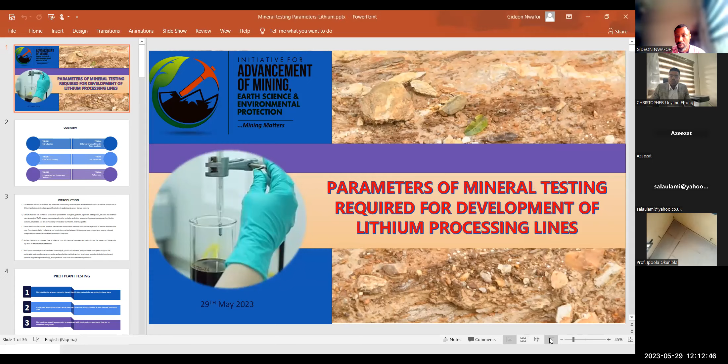You can unmute yourself. You can project from your end, right? He can project for me. Okay. Let me see. Okay, screen. Okay. Is that on now? Yes, perfect. Okay, you can go on.

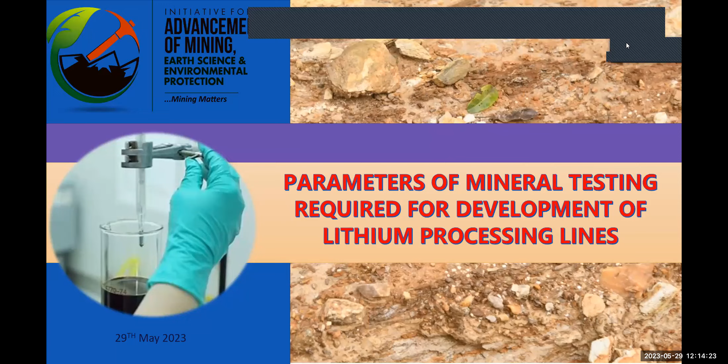Oh, okay. All right. So today we'll be looking at this shortly so that we don't waste much time. And happy inauguration, by the way. Today is a very tight schedule for everyone. I have to just run down just because of this, if not because of Gideon. He knows the kind of project I'm handling right now, so my schedule is very tight. But I just have to make myself available for this, for us. So thank you very much.

So we're looking at parameters of mineral testing required for development of lithium processing lines. And I know a lot of people will say, I'm not an investor. I don't want to build a lithium refining plant, or I don't want to build a mineral refining plant. So why are we having this topic? The way Nigeria is going, I'm promising you, once we get the right people into power, the mineral sector is a sector that can, on its own, take care of the Nigerian economy. I'm telling the gospel truth.

We have all the resources it takes, both critical metals, industrial deposits, base metals, whatever, all the metals you can think of, all the mineral ores you can think of, we have it in Nigeria. And they are not just in minute quantities, they are available in commercial quantities that can be mined and that can actually boost the economy of this country.

So you don't need to take any information for granted, because we already know what's happening in the lithium industry now. It's a far-reaching industry that almost everybody is trying to get something out of. Even the old men, the old women, the children. If you go to some mining sites, you see some children there trying to gather some lithium ores. So it's a very good project and a very good prospect for all of us.

But having said that, before you can set up any lithium processing plant, and it's the same for every other processing plant you may think of, there are some parameters you have to control. There are some parameters you have to test. So I'll be running you through all these parameters. They are many, but I'm just going to make it an overview so that we can get all the information that we might likely need.

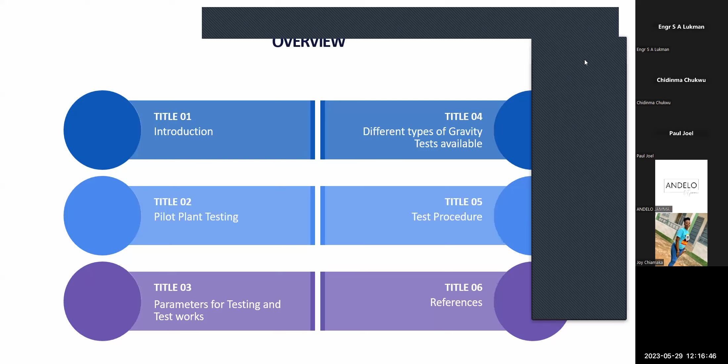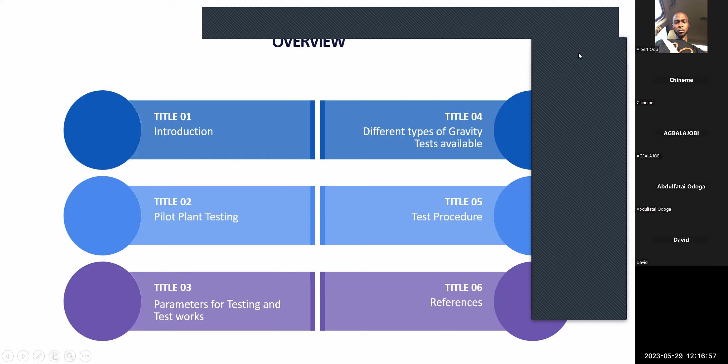Thank you. So looking at the introduction, looking at pilot plant testing, we're looking at parameters for testing and test work, we're looking at different types of gravity tests available, and then test procedure. Please, next slide.

Okay, so already we are all aware of the lithium rush in the world, not only in Nigeria. It's also happening in Africa, in every part of the world. Everybody's looking for lithium minerals, and the reason is simple: because of the use of lithium for different purposes, especially in lithium-ion battery technology, and also as an energy storage system. So everybody's looking for this metal to mine, or some people are looking for mining sites to buy. Like currently in Nigeria, you can see a lot of Chinese coming in on a daily basis to either buy it on the mining site or to actually exploit the minerals, as the case may be.

So it's a very fast growing technology. Lithium industry is a very fast industry in the world as of today. And lithium is not the only energy storage system. We classify it as ESS, energy storage system. There are other energy storage systems that are also in place. Like currently, there is new research on sodium-ion batteries.

The only difference in sodium-ion battery is that it does not have the capacity to store the energy for a long time. So everybody still falls back to lithium. But that does not withstand with the advent of science, and as the research is going on, I believe that they will have a breakthrough too for sodium metals.

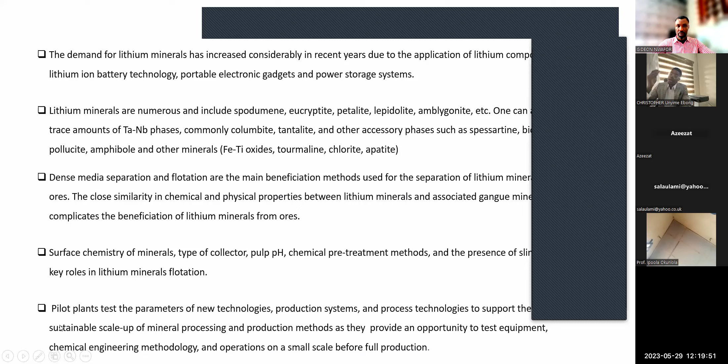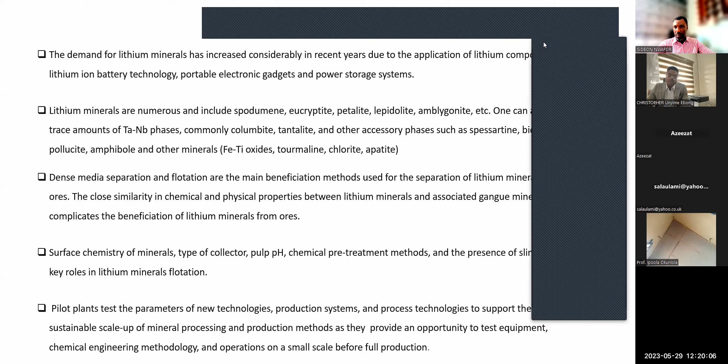All these lithium ores can be processed. Now, the purpose of processing is for us to concentrate these metals so that we can have them in high quality, and at the same time, with low impurities present. So there are different methods, different processes that are used for the processing of these metals, for the beneficiation of this lithium. So we are going to be looking at them, paying attention to the parameters that we need to test while setting up a lithium refining plant.

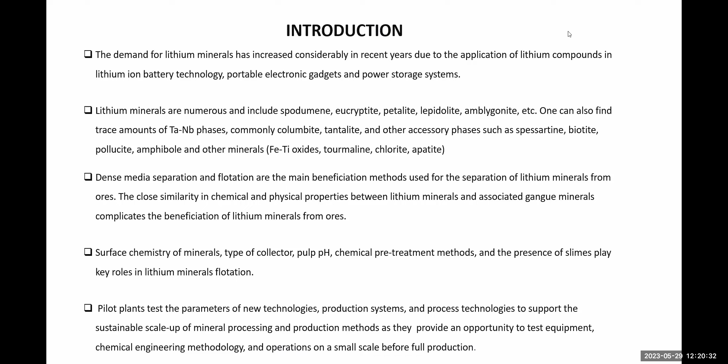And also, before we proceed, I have to pinpoint what we call a pilot plant. Please, next slide. A pilot plant. Next slide, please. Now, this is very, very important.

Last week, I went to one of the pilot plants here in Abuja. Why did I get there? The person called me; it's a lead and zinc beneficiation plant. But I came to find out that most of the lead and the zinc are present in the tailing. Imagine, to those of us that are in chemical and mineral processing, imagine having

So imagine having lead and zinc in tailing up to 20%. That means that a lot of processes were not controlled during the plant startup. And this is giving them a lot of issues because to fix this troubleshooting, they have to start again from the beginning. There's a lot of testing that has to be done, and they are going to spend a lot of money because all this testing was not done at the initial start of the plant. So a pilot plant is very important.

Before you start up any processing plant, first of all you must have a pilot plant. A pilot plant is just a prototype of the main plant, like a specimen of the main plant, but very small. Say, for instance, we have a ball mill of, let's say, 50 tons. In your pilot plant, you can just have a 1 ton ball mill. So everything in the pilot plant is just smaller in size. But the main function of the pilot plant is to reproduce whatever the larger plant is going to have in the long run.

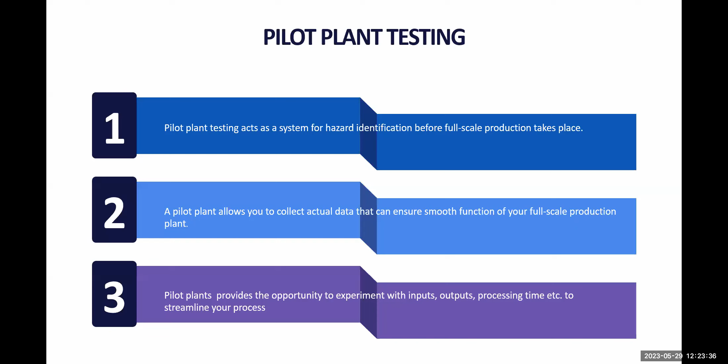So the pilot plant is very important. This will save you a lot of problems. The pilot plant testing, once it's done, will save you a lot of cost because you're able to know which part to optimize, which part not to optimize. You will know the dosage to use and which dosage not to use. So all our discussion today is going to be focusing on the pilot plant testing, because that is where the actual testing comes into play. Thank you. The next slide.

Next slide. So this is just an example of a pilot plant. This plant is designed for a 1 metric ton concentrate, just 1,000 kg. It's designed for it, but you can't use this to process at a profit. So this is just a prototype of the larger plant. After you have done all your testing, from the crushing section to the ball mill to the flotation and stuff like that, and once all the parameters are passed, you can now picture this and make it into a larger plant. Please, next slide.

All right, so why test works? Why do we have to carry out tests? It's very, very important that we carry out tests both in the plant and on the raw materials we are going to use, because it's not just the plant itself, also the raw materials. There's also what we call integrity tests. You have to do your integrity test on your equipment, on your instruments and everything. So one of the reasons why we have to test is for us to fix problems.

Whether your output is actually low grade or high grade, not just for low grade concentrate, also for your feed. If you don't test, how do you know the classification of your feed? How do you know the chemical properties of your feed? How do you know that that particular feed contains the metal of interest that can be separated with high efficiency, and also high impurity concentration, low recovery rate, high production cost, and improper equipment selection.

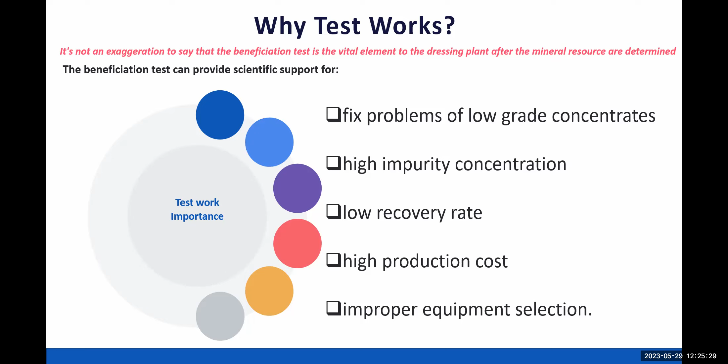So once you do your test, you'll be able to fix all these problems: your high impurity concentration, your low recovery rate, why is it low, and how to troubleshoot it, your high production cost, and also improper equipment selection. So tests will be able to give you scientific support for all this I've just mentioned. Next slide. Next slide.

So there are other kinds of tests to conduct, okay? These are just preliminary tests you have to conduct, like the process check. There's a process check for an existing plant, a plant that is already in existence. It can be your pilot plant or your main plant. So the process check occurs both in your pilot plant and in your main plant. It's just going to check the cause of problems. So you monitor the process, you check what are the causes, what are the problems, you troubleshoot, and then you find a solution.

Also, there's a simple exploration test for beneficiation, for investment analysis and initial value assessment of investment before buying a mining claim. You cannot buy a mining site without doing an exploration study. And as Nigerians, we love shortcuts. I've seen a lot of people go to a mining cadastral office, the office gave them a coordinate, and just because they've seen a coordinate and the mining cadastral man told them that there's lithium, they just went ahead and began to pay money.

It's very, very wrong. Once you see a site that you want to buy, the first thing you have to do is exploration, and not just ordinary exploration. Lithium is relatively a new business in Nigeria, and a lot of our geologists, sorry to say, do not understand the exploration of lithium. So you have to look for people that have the knowledge and experience in exploring these metals, to bring them into action so that they can do proper exploration for you.

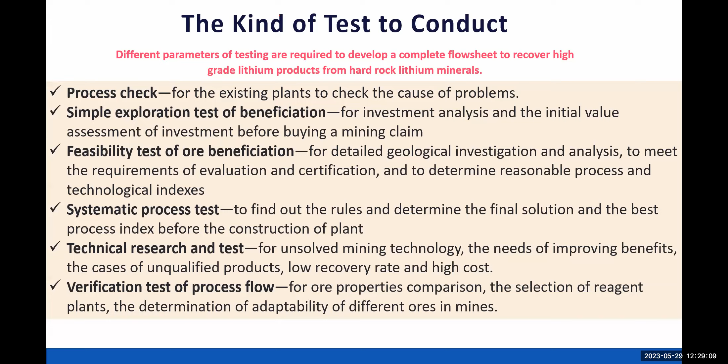All right, so when do we do this test? Remember, we have not actually come to the parameters yet. We are just trying to have the purchase of ores. Before you can buy any mineral, you have to run tests on it. In this case, it might be a chemical test. We are going to come to that in detail. You have to understand what you are buying. And that is one of the problems we are facing in Nigeria as far as lithium is concerned.

You see a supplier telling you it has 7% grade lithium, 7% Li2O. And once you take the sample to the lab, you discover that it's 3%. And possibly you were not so smart, you already paid the man, and he just collected money for 7%. So before you buy any of your ore for lithium, whether lepidolite, amblygonite, or spodumene, you have to run a test on it. The test does not just mean a lab test. There are a lot of different tests you have to do.

Physical test, like for lepidolite, the one they call Morgan. That is one of the local methods of testing lepidolite in the field. Anytime we go to the field, we just carry a bottle of water, and when we see a suspected lepidolite or Morgan, we pour water on it and it changes color. So we just assume that is so. You have to run tests on the ore you want to purchase. The same thing goes for your mining site. You need to also have data on your mining site.

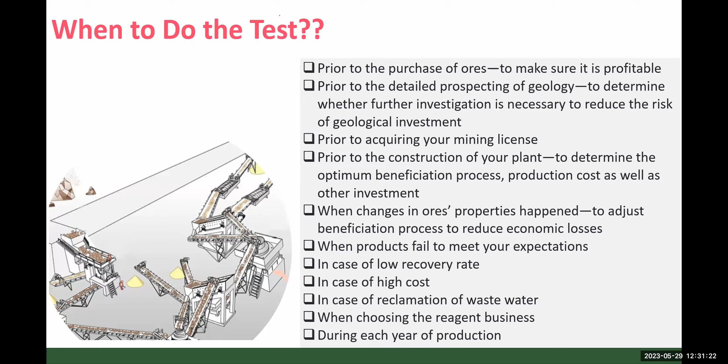Don't rush it, because the moment you start rushing it, you're definitely going to make mistakes. So please, I don't know if I'm rushing because I'm trying to meet up the time, okay? But I don't know if I'm fluid. I think it's okay. It's okay. Yeah. All right. Okay.

So also, when do you also need to test? Prior to acquiring your mining license, you also have to test, and that must have been encapsulated during your exploration. Then prior to the construction of your plant, you also have to determine the optimum beneficiation process, production cost, as well as other investment. So you also have to carry out some tests, including the cost of your investment, which has to be factored in. You also have to test your risk.

Testing your risk. You want to open a beneficiation plant in Nigeria. What are the risks involved? The economic risk involved, the security risk involved. You have to also test those risks and check if it's viable. Currently, my company is setting up a lithium refining plant in Nigeria. And I myself started my career in base metal mineral processing plants for lead and zinc.

But before you set up those plants, you have to calculate the risk. We calculated the risk. If we set up these plants in so-so state, what are the security challenges? If we want to set it in the south-south, how soon can we get the lithium ores? Because there's no lithium in the south-south, except for places like Rivers State, which is just relatively new. So how do we get materials from the north down to south? So you have to test all those risks. There are also parameters you have to test before starting up your plant.

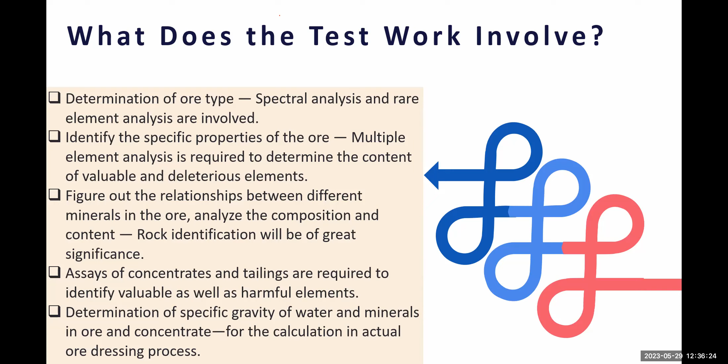All right. Now we are at the main topic: parameters that are required to develop a complete flowsheet to recover high-grade lithium product from hard rock lithium minerals. If I discussed each of them, it might take us up to a month each, because there are parameters inside the parameters. But we're just going to have an overview of what we need to know as a chemist, as an individual, as a civil servant, as people that love metals or mining.

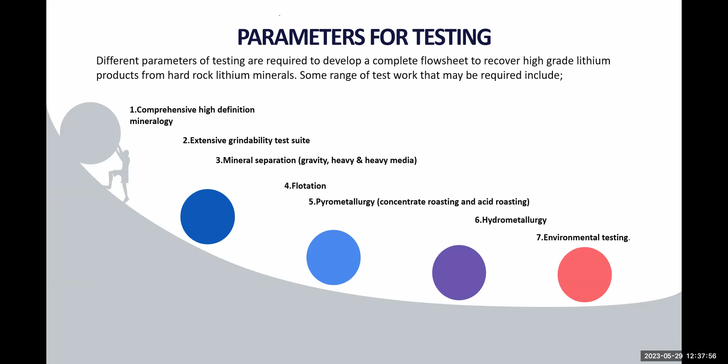I'm going to give you an overview of this so we can go back and look at those parameters to test, so you understand how lithium carbonate and lithium hydroxide are being gotten. So you feed your ore body from the mining site, and they bring it down to your primary crusher.

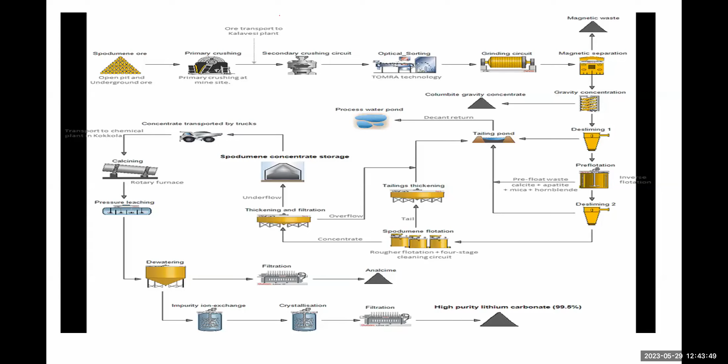Because of the high buoyancy, it floats here with other chemicals that are added, like the collectors that are added to give it that characteristic of floating. So it floats here, and then it moves down to where you now have the concentrate. From your concentrate, you have thickening and filtration, where the water will be removed. Once the water is removed, we move to our concentrate tank, where pyrometallurgy takes place. We subject the ore body to sometimes 1,500 degrees centigrade to do calcination.

We remove every organic matter that is present in the concentrate, so that at the end of the day, you can see the last. Look at the last drawing there that looks like sand, a heap of sand. You can see you're having 99.5% lithium carbonate or lithium hydroxide, depending on the kind of ion exchangers that were used in the process.

So remember here, sorry, I forgot to tell you this, the feed ore for this spodumene we designed is 1.5. So it's 1.5% of lithium oxide. 1.5% lithium oxide was feed. At the end of the day, at the flotation, at the concentrate, we are having 6 to 7%. While at the filtration, after pyrometallurgy, we are having 99.5%.

So you can see that we are wasting most of our ores in Nigeria, because the Chinese man will tell you that if it's not up to 3%, it's not buying. If it's not up to 5%, it's not buying. But you can see that at the end of the day, from 1.5%, we're able to concentrate it to 6 to 7%. So we can actually start this beneficiation plant in Nigeria. We can do it individually, we can get funds, we can get loans, we can start it.

If you go to all the mining sites now in Nigeria, even our own mining site, we already have what we call the intercalation ore. Those intercalation ores are ores that are not up to 3%. We just keep them because of the refining plant. So once the refining plants come on board, we just take all those materials and then concentrate them to 7%.

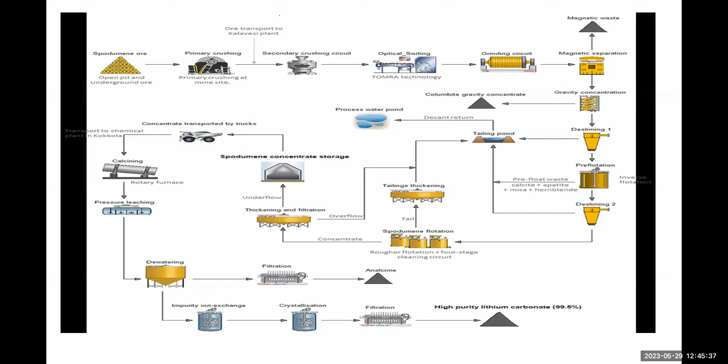So you can see that we are just wasting a lot of our minerals because we don't have a beneficiation plant that can concentrate the mineral, that can convert the mineral from 1.5% to 7% for us. So this is just a simple flowchart of the spodumene beneficiation plant. So next slide, please, so that we look at the comprehensive high definition mineralogy.

Now, this is very important. Test work in mineral analysis is very, very important. For you to understand the constraints of your mineral, you have to test it. Just like I told you, it's not every lithium ore that gives 7% that is spodumene. All right? It's not every lithium ore that gives you 8% that is spodumene. I think last week we analyzed a lithium sample that gave us 4%. I can shock you that lithium that gave us 4% was amblygonite.

But you might not know, because a supplier gave you a sample and the sample is giving you 5%. You're happy, hey, I have spodumene. At the end of the day, you wasted your money, because you are now paying in terms of spodumene, not amblygonite. As of today, I know that the price of spodumene, because of the market, is around 1 million naira, and that of amblygonite is around 600,000. So you're now going to pay 1 million naira for amblygonite, wasting your funds. And at the end of the day, it does not meet your buyer's specification. So test work is very, very important where lithium is concerned.

And in Nigeria, let me tell you the gospel truth, that's the problem we are having, including our so-called government labs. I don't know if there's any government personnel here. Please, you have to go and work on your people. Let's have reputation. The sincere truth is, I've analyzed a lot of results for international companies. Sometimes they will send me a report and say, hey, Chris, look at this result very well. And most of the results I've been getting from Nigeria, 90% of them, are doctored. I'm telling you the gospel truth. Either doctored, or they do not have the proficiency to carry out analysis on lithium minerals.

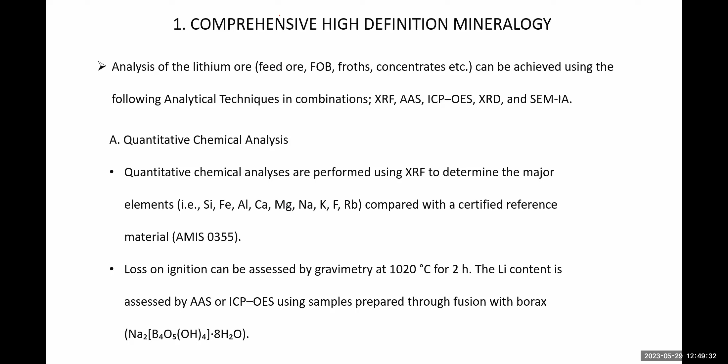And please note this: any method that you're going to use for the analysis of your lithium content must be a flame technique, meaning that the material has to be burnt, the atom has to be atomized, either through absorption or emission. You should have a detector that can detect through absorption or emission. So the flame techniques we have can be a flame photometer, AAS or ICP. All these use heat to atomize the lithium content in the material.

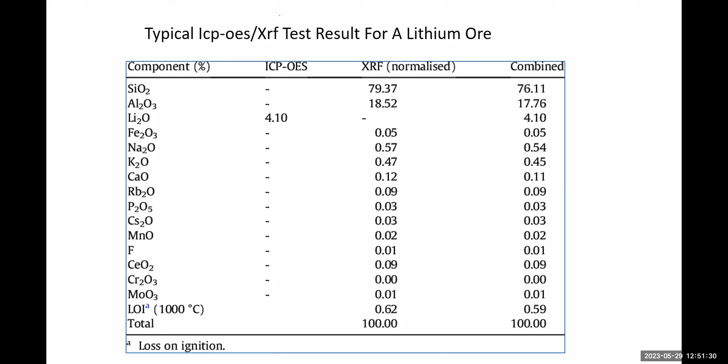But if I don't have lab work on it, how will I know? I might not know. And even in this case, 4% to me is a high feed. I can't feed this into my plant because it's already high. What I need is just 1.5 or minimum 2%. Then I can concentrate it to 5 or 6 to 7. So chemical analysis is very important to understand your ore body. Next slide.

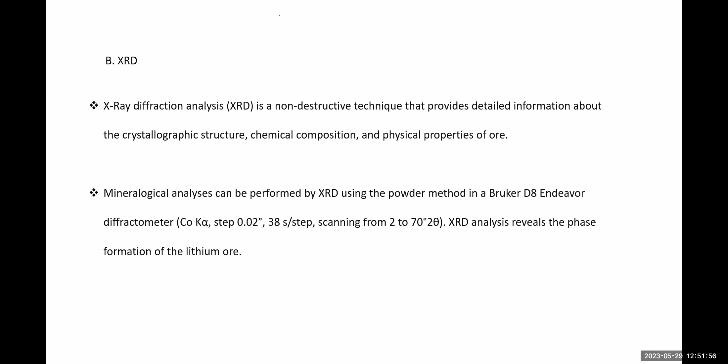And also XRD gives you phase differentiation. The XRF, AAS, ICP-OES and the likes of them cannot tell you the type of spodumene, the type of lithium. But XRD, with phase differentiation, is going to tell you which lithium ore is present in the site. Look at the next slide. Now, this is a typical result from an XRD analysis that was done for a sample that I want to use in my plant.

So you can see now that the XRD analysis, from the chromatogram you are seeing there, gives you the different kinds of lithium that are present. You can see alpha spodumene and beta spodumene. The alpha and beta is just a difference in temperature. The normal occurrence of spodumene is alpha, and once you heat it to 1000 degrees centigrade, it's converted to beta.

So in processing, once it gets to concentrate, what we are now working with is beta spodumene, no longer alpha. But at that initial ore stage, raw ore is alpha spodumene. It can also show you the quartz content, the albite and the lepidolite, beryl, and others. It shows the compounds that are present other than just the lithium.

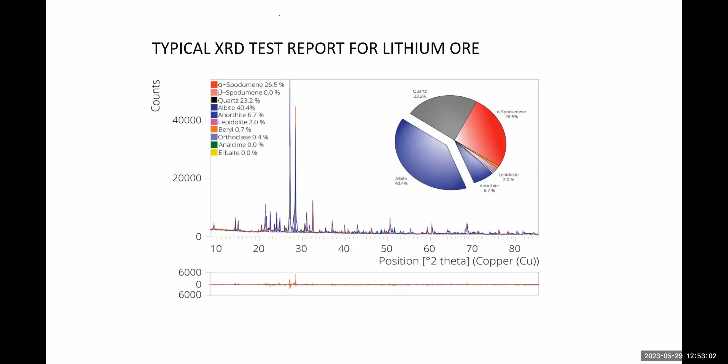Or even if it's a lithium material, what kind of lithium is present? XRD is going to give you that phase differentiation, that detail. So chemical testing is very, very important as one of the parameters for working on a lithium processing line. Please, next one.

Now, this is also very important. When I was explaining the flowchart for lithium processing, I made mention of the crushers, the jaw crushers, the primary crusher, secondary crusher, and the ball mill. Now, this is where these factors come into play. Extensive grindability test. A grindability test is a procedure that evaluates the resistance of a material to ball milling. This test is an effective way to calculate and compare the bond work index, BWI, of different ores. The higher the bond index, the more difficult it is to grind the material.

Now, you have to understand your ore body. How hard is your ore body? Because the hardness of the ore body determines the kind of crusher you are using. There are some beneficiation plants, like the one they recently commissioned in Zimbabwe. I have a friend that is working there. They only have one crusher, a secondary crusher. From the secondary crusher, it moves down to the ball mill, because they were able to do a grindability test to study the hardness of the material.

So before you even set up your plant, you have to understand how hard is this mineral? Is this mineral hard? And what is the extent of the hardness? So that's what the grindability test is all about. And if you don't test this, and then you go and use a particular...

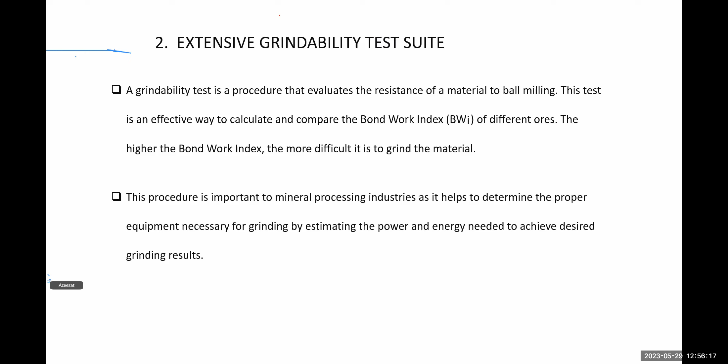So let's look at the ball mill here. Next. This is just a ball mill that does the grinding work. In our own, 25 mm is fed into the ball mill, and at the end of the day, we're having 75 microns, or 200 mesh size. So if you don't understand the grindability study, you might end up losing your ball mill all the time.

So because there are different kinds of ball mill for different specifications, you cannot use the ball mill that is used in gold. You can't use that one if maybe you want to do rutile or tin ore. You can't use it because they have different bond strength. They have different grindability test results.

So you have to use a ball mill that has the capacity to be able to grind your ore body into the specified size without getting itself damaged, and at the same time also have efficiency of grinding. This our presentation does not cover efficiency of grinding.

But in a nutshell, let's say you are feeding in 100 kg of material to the ball mill. How many percentage do you have as the output of the ball mill? So you can also calculate the efficiency of the ball mill as well. Please, the next slide.

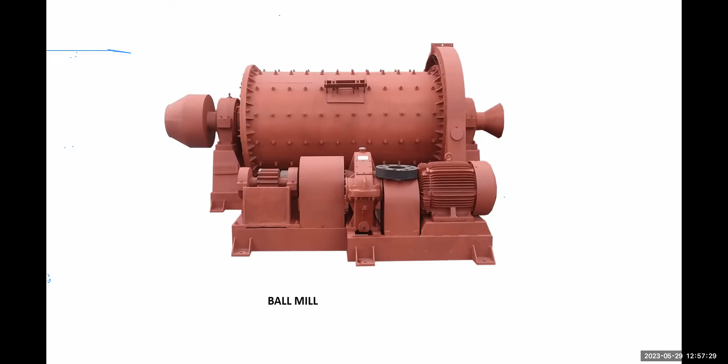So this is just what happens actually in the ball mill, where there's impact. For material to be ground, there must be impact, all right? Two materials coming together with each other, and then compression. Compression must take place where the balls, that's why they call it ball mill. So there are balls inside that hit themselves together. They also hit the material, thereby bringing the material into a tiny particle, which we call compression.

And also there's friction, two surfaces of the material come in contact with each other. So that friction can also result in the grinding of the material in question. So if your bond work energy is not enough, impact will not be efficient, compression will not be efficient, and friction too will not be efficient. At the end of the day, you might end up not having the required grain size for your beneficiation.

Remember, beneficiation deals only on grain size. If the grain size is not fine enough, it can't float. It can never float. So you must ensure that your grinding test is positive. If it's not positive, you have to go back, study your ore nature, then look for a ball mill that has the capacity to grind the ore.

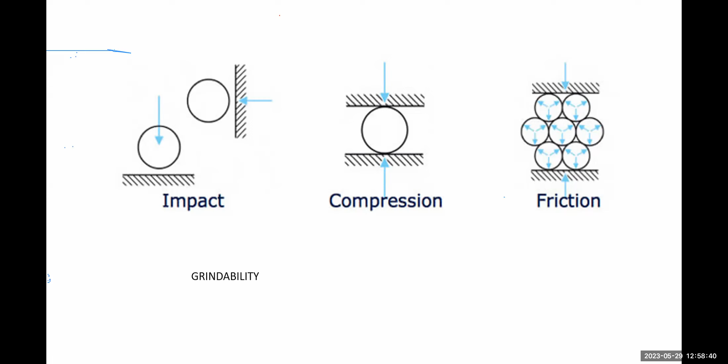Please, next slide. So these are different kinds of ball mill, other types of techniques that are used for grindability test. I think once the slide is shared, you can go and read on it. But we are emphasizing on bond work index test. That is the one we are concerned about because that is the one we are using.

Bond work index test. This one is to calculate the power requirement and the size of rod and ball mill for a circuit. So if you can only do this bond work index test for your plant, it's enough. It covers everything because it will determine the power. When we talk about the power, we're talking about the energy needed by the ball mill. You can't be having a 500 kVA generator and you are using a ball mill of 499. You definitely kill your generator.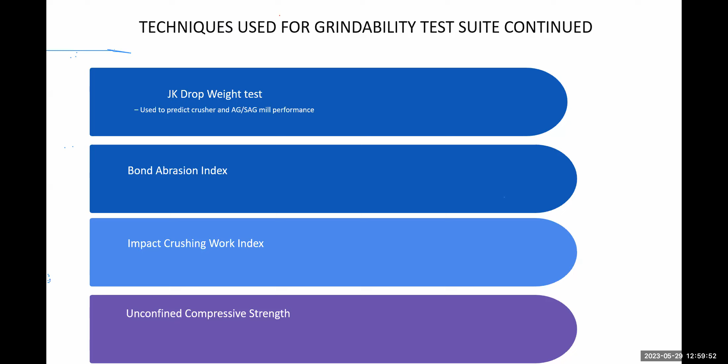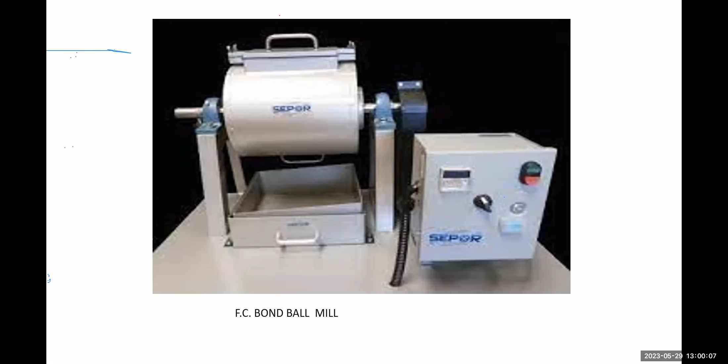FC bond ball mill. This is the equipment that is used in doing grindability tests. So let me just give you a quick run of the procedure. How do you do this grindability test to determine if your ore body is suitable for that particular ball mill? Please, next slide.

A test sample is staged. Your feed is crushed to 3.5 millimeters maximum feed size, and then it's compacted into a 700cc tube. You just have a tube, either a glass tube or a PVC tube. You add your 3.5 millimeter feed into this tube. You compact it very well, make sure it's compacted.

Then you measure it. Once properly measured, the sample is placed in the universal FC ball mill. That's the equipment I just showed you before now. You place the sample inside there to accurately calculate the bond work index of the material. What does the machine do generally? The machine carries out what we call revolutions. Once you put your sample into that machine, there's revolution.

So as the revolution is going on, remember what I showed in the other slide, impact will be recorded, compression will be recorded, and then friction will be recorded, because these are the three parameters that cause grinding.

So these are the three parameters that cause the grinding. After a set of revolutions is completed, the sample is removed and then screened over 100 mesh size. So after the grinding is done, after the revolution is completed, you have to screen it through 100 mesh size, and then you calculate the amount that is on the top, like you can call it supernatant in this case. The supernatant that is on the top of the screen, you can call that one negative, and then you calculate over the one that passed through the 100 mesh size.

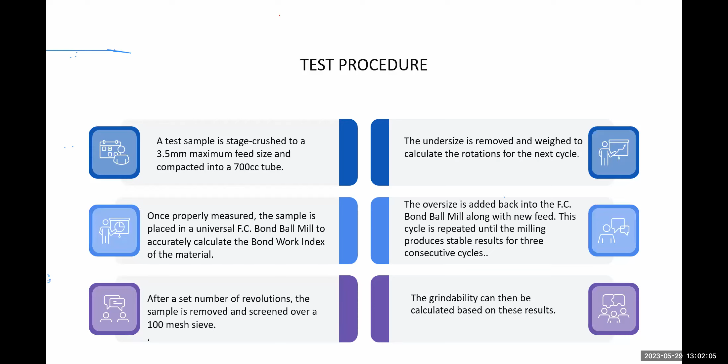All right, so we are having two things now: the supernatant negative on top of the mesh, and then the one that passes through the mesh. You can call that one positive. So those are the two values that we are going to use to conduct this test. Now there's a formula. Please, next slide.

Okay. Now the bond work index. Remember, we're looking at the bond work index. The bond work index is measured in kilowatt-hours, typical values range from 7 to 20, all right? Soft material has a BWI of between 7 to 9. Anything over 14 is considered hard. So once you do this test, your result is definitely going to tell you which ball mill you are going to use.

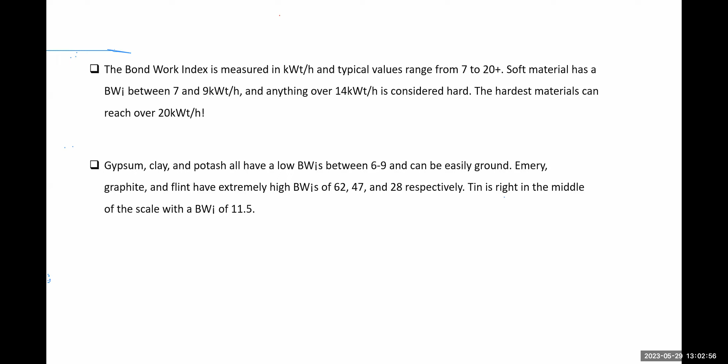Remember, there is a lot of chemical engineering work that has to be done here, but I'm not taking us to the engineering part. I'm just trying to make us have a knowledge of what a grindability test is. There are a lot of calculations here, but we are not touching that. What we just want to know is that you have to know if your material is soft, if it's suitable for that particular ball mill. If it's not suitable, then you look for another ball mill. So, for instance, look at this scale. Next slide.

This is a table that shows different minerals, bauxite, copper, down to zinc ore, with different bond work indexes, all right? And we already classified, according to our previous slide, from 7 to 20; from 7 to 9, they are soft material. But anyone that has a value above 14 is considered to be hard. So you can look at this table here.

Look for copper. Copper is 12, so it's relatively still a little bit hard. Look at limestone, it's 12 too. Look at zinc ore and rutile too. They are also 12, so these ones are also relatively hard. You can also see the equation here. After you have done the grindability test, remember I told you that you're going to have some part suspended on the top of the mesh, and some part that is going to be at the bottom.

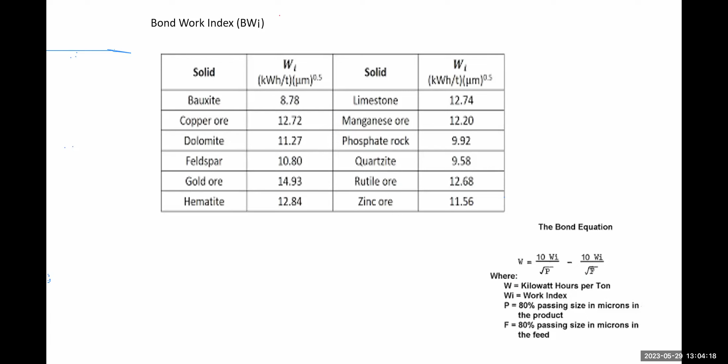So these are the factors: P, the 80% passing size in microns of the product, the one that passes through, and then the 80% passing size in microns of the feed. So you take all these parameters into the equation, and you'll be able to calculate the bond work index. And once you have the bond work index, you're able to look for a ball mill that has the capacity to mill or grind that particular ore body. Next slide.

So mineral separation. For mineral separation, we have gravity, and also heavy liquid and heavy media. Gravity tests, also known as gravity separation tests, are used to determine if an ore constituent can be concentrated by exploiting the differences in density, shape, or size between the constituent of interest and the waste material. Remember when I was giving you a flow chart of the spodumene processing plant, I told you we have a gravity channel, all right?

So the gravity test takes into consideration the difference in density. So if you have spodumene having a density of 0.5 grams per cm3, if you add it to water, it's definitely going to float. So that is also a mineral separation technique that can be used in processing of lithium minerals. All right, next slide.

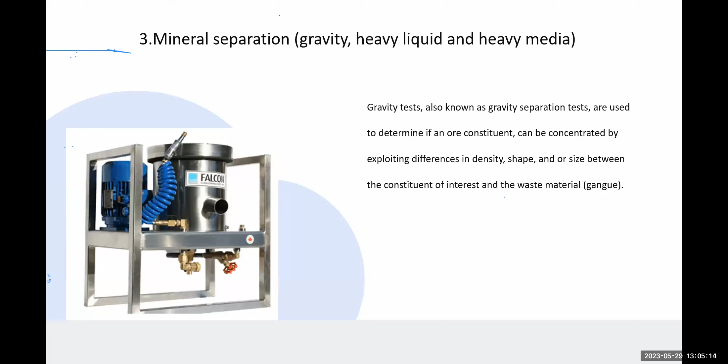Next slide. Okay, so why use gravity concentration? Why do we need gravity concentration? Now, gravity concentration is often an effective and economic unit operation with low capital and operating cost. It does not need much money. You just have to take advantage of the density of the two materials, the one that is floating and the media itself. So the process can also be environmentally favorable, as little to no reagents are used in the process.

I told you earlier, it's just your water, and then your analyte of interest has been floated due to their difference in density. Gravity separation is an industrial method for separating two components, either in suspension or in dry condition, from a granular mixture. Remember, for floating to be done, the material has to have sufficient buoyancy. You have to take note of that.

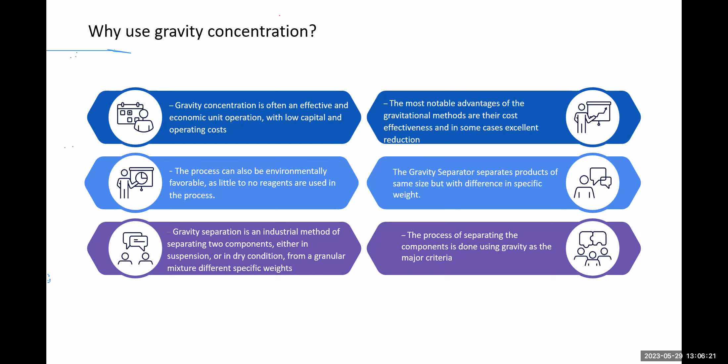Because I'm saying that the gravity of lithium is 0.5, it does not mean that if you carry a lump of lithium and add it to water, it will not sink down. It definitely sinks down. But the gravity here, we are considering the gravity based on the buoyancy. So the buoyancy at a fine grain size is 0.5, which means that it has a density that is lower than that of the water. All right, please, next slide.

Now, if peradventure the iron content is high in that particular lithium material, what do you think will happen? It's simple. Iron has a higher density than water. So once you have an iron content, the iron content will sink. So in this case, you're now collecting the iron as a tailing. Okay? While you're now collecting your lithium as the froth, because it will now be frothing on top, because both of them have different densities.

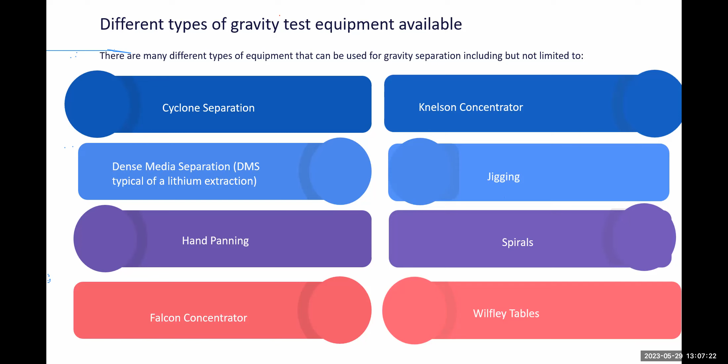So we are currently using hydrocyclones, all right? There's also dense media separation, hand panning, and so on and so forth. So these are different types of gravity test equipment. Next.

So how do we conduct gravity test analysis? How do we do that as a chemical engineer or as a mineral chemist? First of all, gravity test procedure can vary depending on the type of equipment being used. Just as I said, there are different kinds of equipment like the hydrocyclones. So if you are using hydrocyclones, there are different kinds of techniques you have to use. Generally, a known amount of material is processed by gravity concentration equipment.

So you send the material to your gravity equipment, all right, with the different reagents. If you are using water or any other reagent, you feed in the material, and as a result you're going to have a concentrate and a tailing product. The concentrate can be the one floating, or it can be the one at the bottom. You collect it as tail, as the case may be. So the concentrate and tailing are then weighed, dried, and assayed to determine final constituent mass balance and recovery.

What do we mean by this? Remember, the purpose of processing is for us to concentrate the ore. So take for instance, you are feeding in 1.5% Li2O. Now, if you pass it through the gravity test, we are expecting you to have at least an increment from the initial feed. After you've gotten the increment, you have to calculate the percent recovery of the increment. So if the percent recovery of the increment is not sufficient enough, then that means something is wrong with your gravity test, and you have to revisit it and work again.

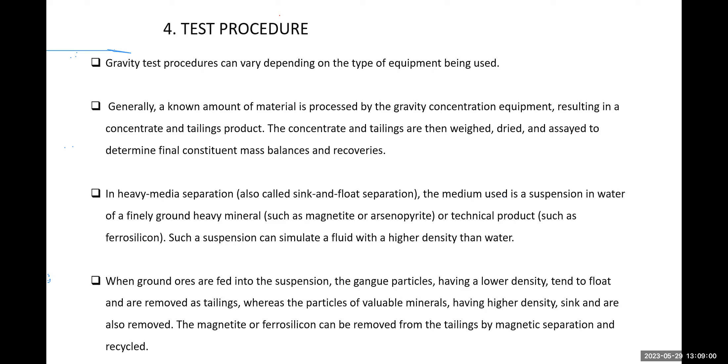So how do you know that the increment is sufficient? You have to test the concentrate that is gotten from the gravity test and also the tailing. Remember, either the one floating or at the bottom. You have to test those two, and then from there you get the result. It is that result you're going to use to fine-tune your process. Okay, next one because of time. Next.

Yes, flotation is a very important part of mineral processing. After I've taught flotation, I think we are almost at the end of the slides, so don't worry, we're almost going out now. It's very important, especially when it comes to lithium, all right? There are other different techniques that can be used for extraction of lithium, but flotation gives us the best recovery. And currently, from our plants, the specification, everything is done based on flotation.

And if you have been following what I've been saying from the beginning, flotation is the most widely used method for the concentration of fine-grained minerals. It takes advantage of the different physicochemical surface properties of minerals. It has to do with the surface chemistry. All right. Sometimes surface chemistry might not be an inherent nature of the ore. Please take note of this. Sometimes the surface chemistry of the material might not be an inherent nature of the ore, meaning you have to impact on it by using chemicals and reagents.

Like for lead and zinc, if you are processing lead and zinc, once you get to the slurry, you have to add different chemicals. You have to add your MIBC, your xanthate, you have to depress, you have to activate with copper sulfate, zinc sulfate, and so on and so forth, because you want to play with your surface chemistry. You want to see which one can float at the expense of the other one, all right? So the surface chemistry property sometimes might not be an inherent nature of the material. Sometimes you have to enforce it by using some chemical reagents.

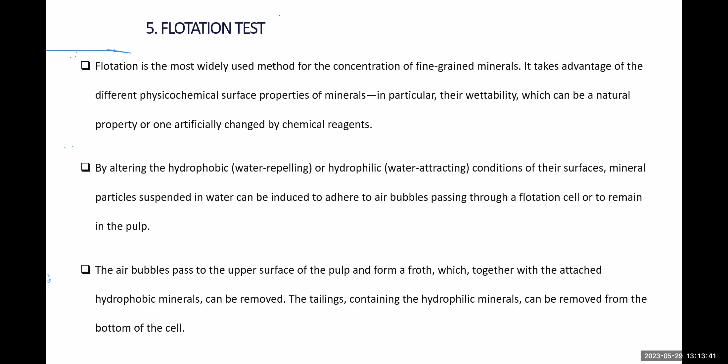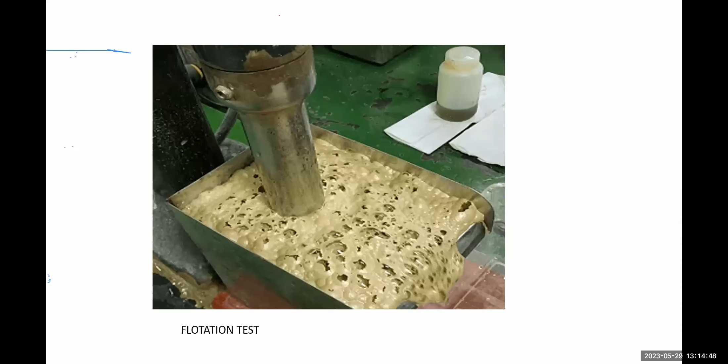Whatever you're scraping out contains the analyte of interest, which in this case is our lithium oxide, not hydroxide. Hydroxide is gotten from the refining process. It's oxide that you get from the beneficiation. So all these things you are doing here, you are just trying to concentrate the oxide to 5 to 7% oxide. Next slide. Then we are almost done.

Now, the flotation test, very simple. A known amount of ore and water is added to create a slurry. We add a known amount of ore and also a known amount of water, and we create a slurry, like a paste, just like what I showed in the previous slide. Then we add reagents. Why are we adding the reagents?

I told you earlier that some of these minerals do not have inherent surface properties, so you have to alter their surface chemistry. So sometimes you add reagents to it. In this case, we add some activators, sodium hydroxide, depending on whether it's spodumene or lepidolite. Once you add it, you'll be able to alter the surface chemistry of this material. Then chemical collectors are added to the slurry to form hydrophobic surfaces on the constituents of interest. So you form hydrophobic surfaces.

When we say hydrophobic surfaces, it does not get itself attached to the solution, because hydrophobic does not react on its own. It does not love anything. So it's easy for this hydrophobic material to come out from the solution and then you scrape it out. Now, air or nitrogen is then bubbled through the agitated slurry. The air bubbles come into contact with the hydrophobic surfaces, transporting them to the surface where they form a froth or foam.

The hydrophobic nature, which you have changed using your chemical dosing, is blown up by air or nitrogen. Sometimes, like the ones we have here, you are not going to add any blower or compressor; it comes together in the system. But for some you have to fabricate a blower that will increase the buoyancy of the grain material. So it blows the material as air bubbles, and they come in contact with the hydrophobic surfaces, transporting them to the surface where they form a froth or a foam, like what I showed you.

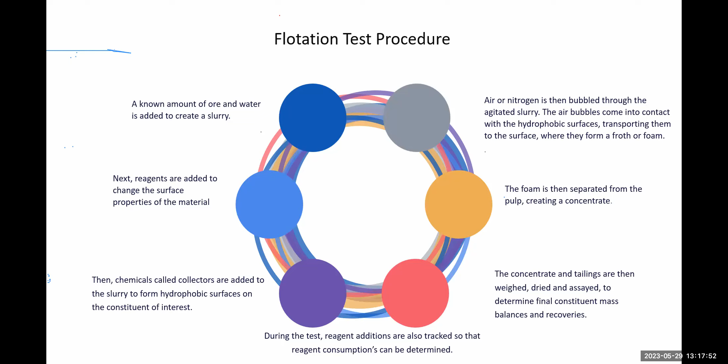If you don't control this process in the beginning, you're going to spend a lot of money and waste your energy, and who knows if it's going to work or not. So you have to test all these parameters. Okay, so pyrometallurgy, please next slide. Pyrometallurgy has to do with, next slide.

Okay, this has to do with, now you've gotten your concentrate, you are trying to move the concentrate from just being a concentrate to a refined lithium hydroxide or lithium carbonate that can be used for the production of our ESS, energy storage system. So it's just for you to do calcination, all right?

You subject the ore to high temperature, sometimes using a furnace, or it can be a hydrometallurgy process. So you use a furnace, you heat the concentrate, you remove all the organic matter that might be present, and every other volatile organic constituent that is present, you remove them, and then the refining process continues.

You pass it through your ion exchange, you remove any other material that is present through your ion exchange. From your ion exchange, you'll be able to have your lithium concentrate, your lithium hydroxide or your lithium carbonate as either 90% or 99.9% lithium carbonate or lithium hydroxide.

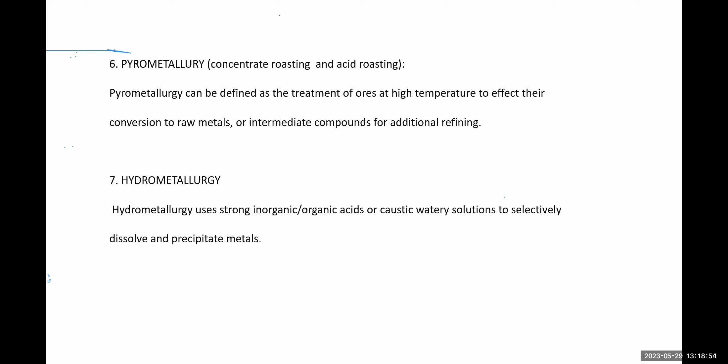And then lastly, which is very important, is your environmental testing, which is what we are still lacking in Nigeria. I've been to four plants in Nigeria, one for copper, one for zinc, two for lead and zinc. What I noticed is that our Ministry of Environment is not doing their job properly.

Take for instance, you have sodium cyanide, you can't dispose of your sodium cyanide properly, and it gets back to the environment. It has a lot of implications for the health of the people, the health of the society. You are putting the health of the society at risk. So at the end of the day, you have to ask yourself, how am I going to control the effluent I'm generating through this process?

It's not just good enough for you to have a pilot plant or to want to build a big plant without also taking into consideration the environmental impact, the health impact it's going to have on the general populace. So it's also very important that we do environmental testing. And one of the best ones we normally use in environmental testing is the bottle roll test.

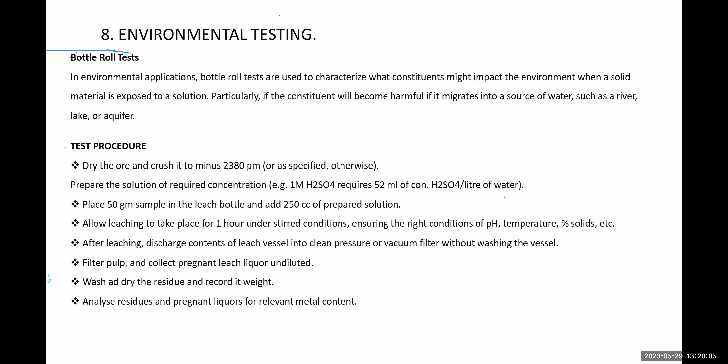Very simple test. It's like a leaching test where you take your ore of interest, maybe lithium, you add some solutions to it, and then you agitate it. There's an instrument that does the agitation. Please, next slide, let me show you the equipment that does the agitation. Next slide. Okay, the instrument that does the agitation.

So you insert your sample inside with a different reagent that will cause leaching. Agitation is done. Once the agitation is completed, you take out the solution and run a test on it. Now, why are you testing it? You are testing it for parameters that might be dangerous to health or dangerous to the environment, including your marine ecosystem as well.

So you test for parameters like mercury, lead, and all the rest, because the solvent you are using for this extraction must be able to extract lead, mercury, and every other harmful element that might be present in the ore body. So you insert it into your equipment, you agitate it for some hours, and then you bring it out, and then you carry out a lab analysis to determine the concentration of each of the parameters, and then you assess it.

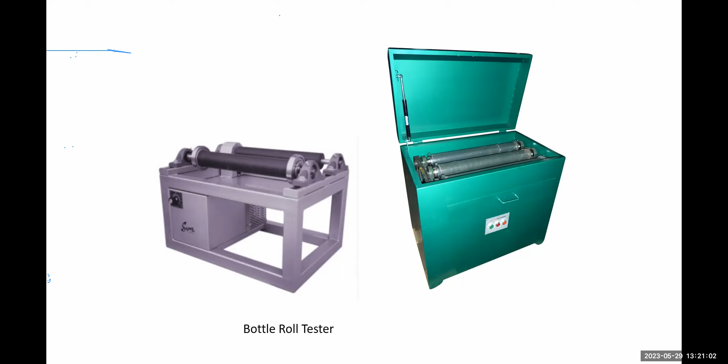I think this is all we have for now. We can't go far because of time, just trying to rush it, but the thing is just simple. We can develop this lithium refining plant. We don't need to waste our 1.5%. The 1.5% can be beneficiated, and we have 6%, and we can now sell our 6%.

So no need for a Chinese man to be telling you that it must be 6%. You can always tell them to support you, that it's possible. You can get a lithium refining plant in Nigeria, anywhere you are. It's possible. It's the same flow sheet, same flow chart, the same processes as every other base metal beneficiation, and you definitely get your value. So thank you.

Ensure that you do your testing properly. It's very important. Grindability is very important. Your ball mill should be able to grind and give an appropriate size, and your flotation should be able to manipulate the surface chemistry, so you can have a good extraction process.